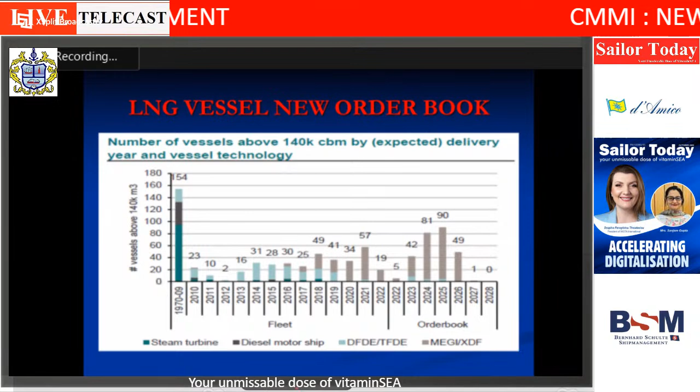And these are the containment types. If you see LNG percentage of total fleet right now, mostly membrane vessels. There are two companies which are pioneers in gas carrier construction: one is Gaztransport, and the other is Technigaz. Both are French companies, and they merged together close to 2000 to become GTT, Gaztransport & Technigaz.

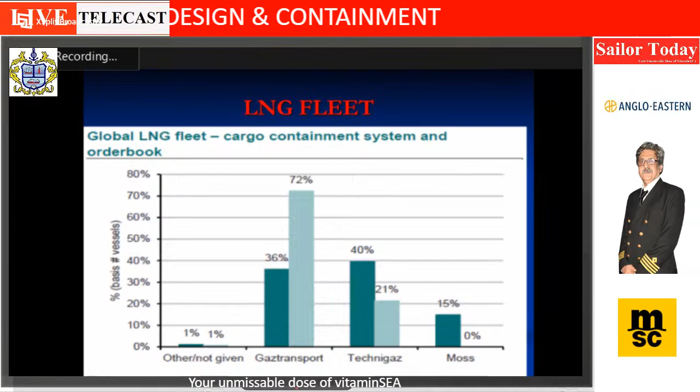If you see the percentage of total fleet right now, roughly 36% is Gaztransport and 40% Technigaz, that is Technigas Mark 3. Mostly there are Moss spherical type, what we call about 15%, but if you see the future new orders, there is nothing there. So the future is Gas Transport, which is about 72% of orders, almost double the existing number. Technigas right now is about 40%, but there are 21% new orders as you see.

This is the engine type, which MD Mr. Satya Singh will cover in more detail. But if you see, right now there are more than 150 ships, maybe next year. If you see the orders, it goes to more than 400, and he will cover more details on this.

The next one is DFDE and TFDE, dual fuel, so you have about more than 200 ships, but if you see the orders, not many. Same way, diesel motor, not many new orders. The new order maximum is 323, what you saw, mostly covering MEGI and XDF. So that's about the proportion - the future will be mostly MEGI and XDF in LNG vessels.

And these are the containment types. If you talk about what are the containment systems in new LNG vessels, self-supporting is mostly Moss type.

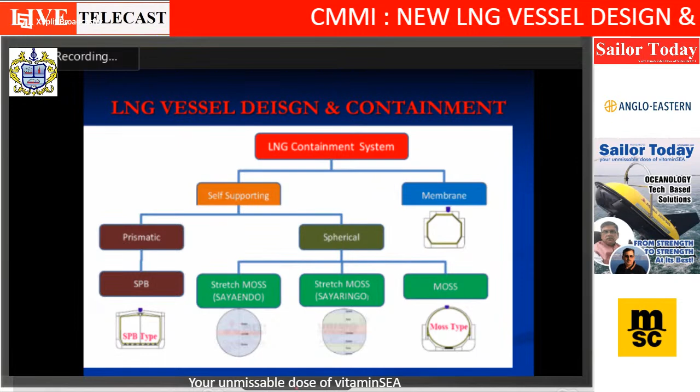But the maximum in number, if you see on the right side, which is membrane, you have NO96, Gas Transport NO96, there is a new design, and Mark 3. Also there is Mark 3 X and X Plus. And Moss, there are not many, but there are a few new designs of Stretch Moss. Standard Moss is about 140k cbm, and it is now stretched to close to 150 and gone up to 180.

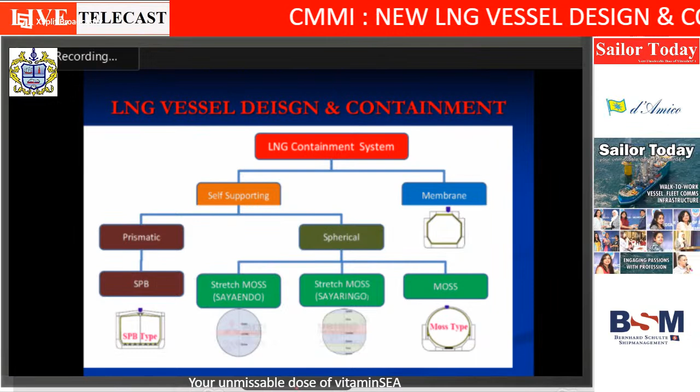So that design is Stretch Moss, but in future as you see there is hardly any. So those designs we call Sayaendo, which is Stretch Moss about 155, and the other one is 180. We just covered each one, and this is the membrane type.

Mark 3, there are a few new versions - Mark 3, the last one, Mark 3 Flex, comparatively much better, and on GTT NO96 also the new design. CS1 came way back in 2003 or 2004 but was not successful. Three ships came out but after that nothing.

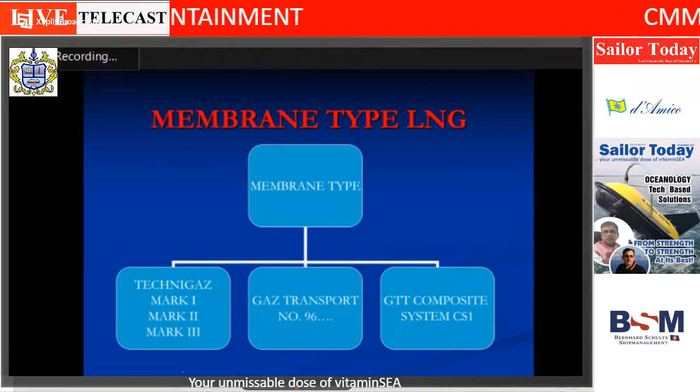So as far as the picture is concerned, it is Mark 3 and 96. Most of the yards in Korea and China use GTT, so it's either Mark 3 or 96 newer version. These are some of the numbers - if you talk about delivered and also on order combined, 96 is about 354 ships, present plus ordered, about 44% of the total. Mark 3 is about 56%.

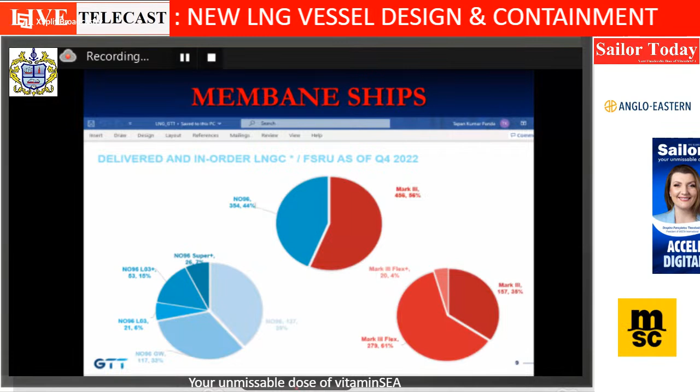And these are the breakup. If you see on the left side, breakup is about 26, 7% in NO96 Super+, LO3 15%, and glass wool, GW glass wool is about 33%, but present is about 137, which is roughly about 39% of the number. And if you talk about Mark 3 Flex, it is about 61%.

So that is covering most of it. The future is Mark 3 Flex design. I have some photographs also.

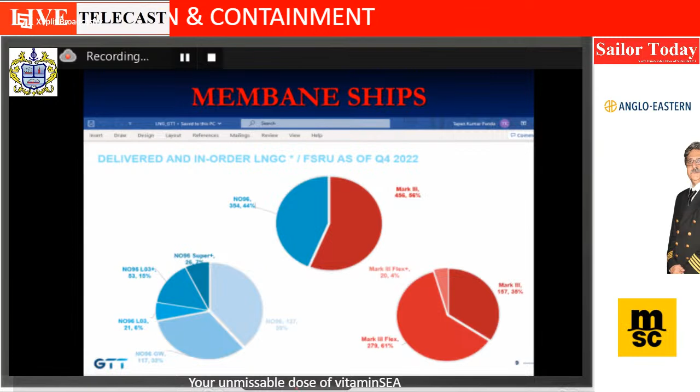So if you see the thermos flasks - the glass design in Mark 3, you have 1.2 mm stainless steel membrane. Glass coating is replaced with 1.2 mm stainless steel coating, that is your primary barrier in Mark 3 design. And NO96, it is Invar, 0.7 mm steel membrane. I have some better photographs where you will be able to see.

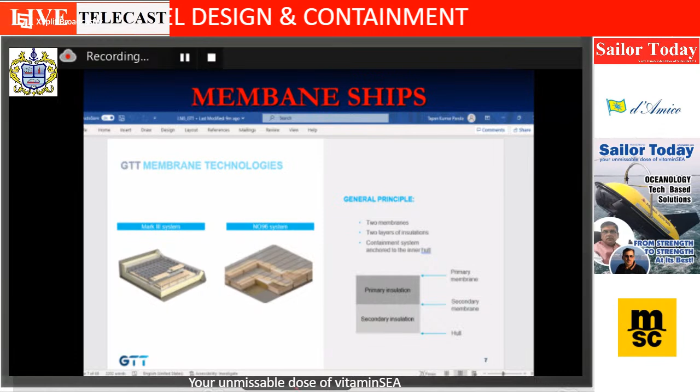So this is on the left, as you see in Mark 3, that is 1.2 mm. But NO96, it is 0.7 mm Invar. There is also a primary barrier and a secondary barrier, ensuring that the cargo is kept safely. So this is how NO96 Invar membrane looks, Invar 0.7 mm.

Now what is Invar? Invar is a stainless steel alloy with 36% nickel. Nickel is very good when you talk about low temperature cargo, that helps quite well. And what you see behind, we call it tripod mast - all your pumps and everything you will be able to attach to that. All precision instruments are attached to tripod bars. So this is how a tank looks like.

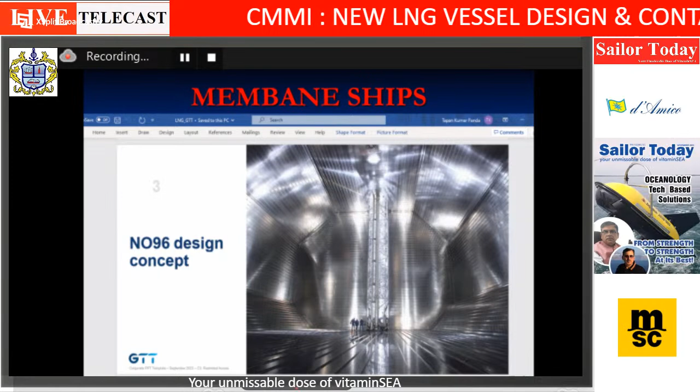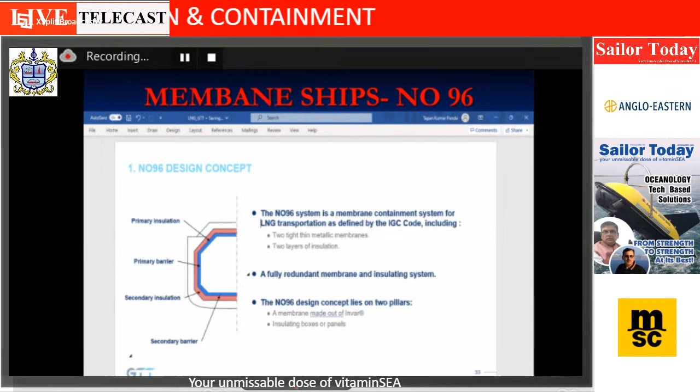There are two options, both successful for almost the last 20 years. From the 90s, these two designs have come and become successful. In the future, it will be both Mark 3 and NO96, and both are under GTT. GTT is when a ship is built, you need to ensure that the tanks are constructed with the design they are, and they ensure everything - in case any problem like a leak occurs, they also look after it.

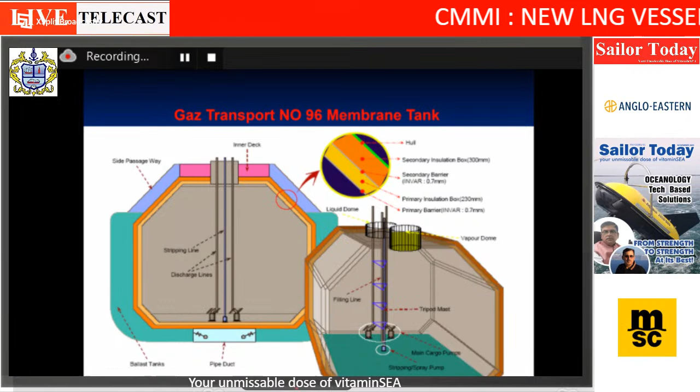And these are some photographs of primary and secondary barrier. So if you see this is the NO96, and primary barrier is Invar 0.7 mm. Primary insulation box is 230 mm. Secondary barrier again Invar - so there are two Invar membranes in NO96, 0.7 mm, very thin membrane. And secondary insulation box is 300 mm, those are plywood boxes. As you see the tripod mast behind, that is liquid dome.

So this is Invar membrane NO96 under view, and nickel is 36%. That makes it better and healthy. So this is NO96 design.

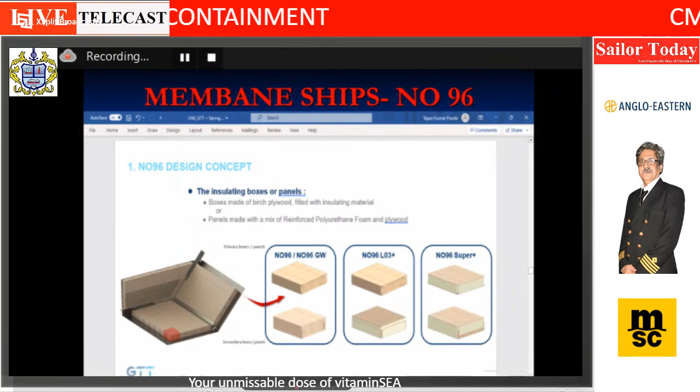So NO96 - now the latest versions are one is glass wool, other is L03, and the advantage is when you talk about boil off rate, every day how much liquid will evaporate. So with this new design, the boil off has come down from 0.15% of the whole volume to almost 0.07. So the third one, NO96 Super Plus, close to 0.07 boil off, and initially it used to be 0.15%, which was accepted at that time. Now it has come down.

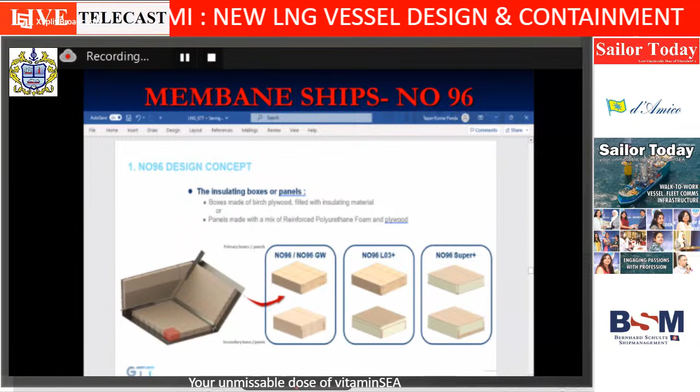So these three designs ensure boil off control is much less, and also many of the designs are now with PRS and FRS, which also helps in a way. So this is the insulation in NO96. Same way we'll see also Mark 3.

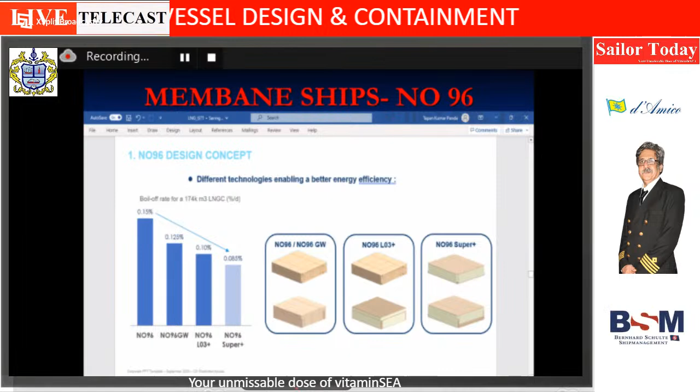And live boxes, as you see on the screen, this is how it looks like in glass wool and L03. They are always actually foam. Super Plus also with foam.

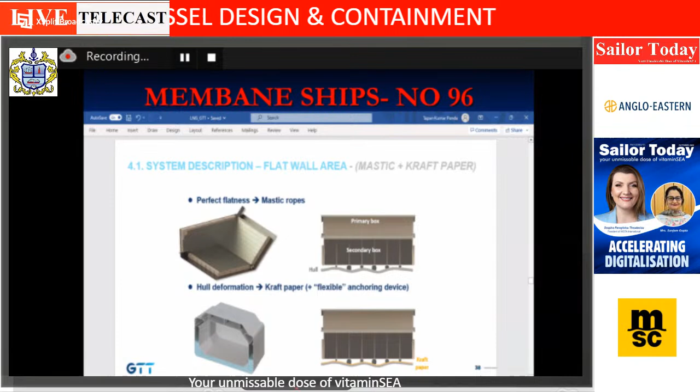This is another view of Invar membrane, 0.7 mm. This is NO96. And this is the primary box and secondary boxes in NO96, your design.

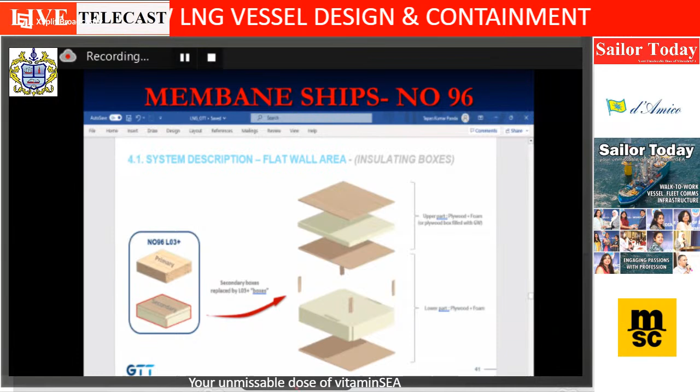This is foam. And if you try input with the new NO96 design, now we use the Mark 3, with primary boxes and second box. This is 1.2 mm stainless steel membrane, which is for Mark 3.

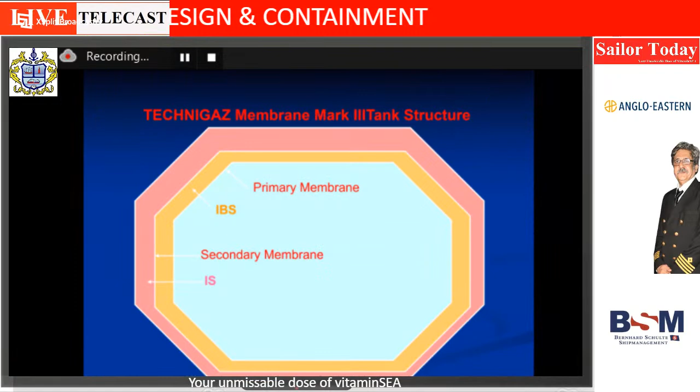So what you see is 1.2 mm stainless steel, but it will be reinforced, and there are compressions, two each, sort of corrugation. So this is the IBS. What we call the primary barrier is 1.2 mm stainless steel, secondary barrier is 0.6 mm triplex, and the yellow color is the IBS, interbarrier space, which is generally pressed with nitrogen, so you have to do a nitrogen generator.

So that takes care of it. In case there is any leak, you come to know with nitrogen pressure. There are some settings also for IBS and IS. The pink color you see is IS, insulation space, and then the cofferdam and the inner wall.

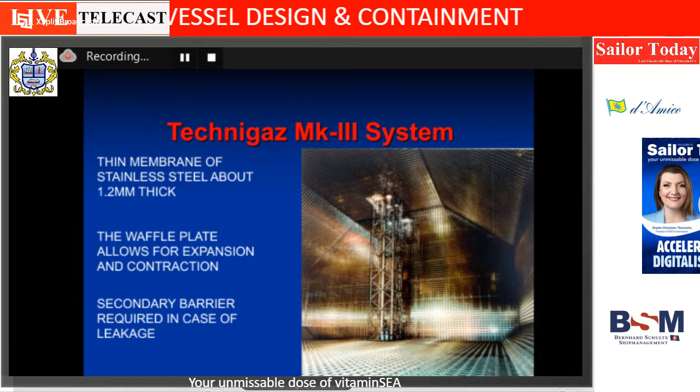This is another view of Mark 3, this 1.2 mm stainless steel plate. This arrangement we call the waffle plate arrangement, and that is good for cryogenic. So when you talk about low temperature cargo, it helps.

This is magnified, with the primary barrier being 1.2 mm stainless steel plate. Primary insulation is 100 mm, and the secondary barrier is triplex - what is triplex we will see in a later slide - and the secondary insulation is 170.

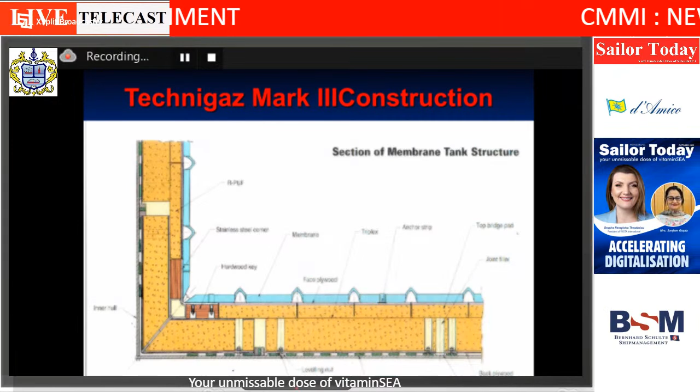This is another view. So what you see, the primary barrier is 1.2 mm, and what is protruding out is the waffle plate arrangement. That takes care of expansion and contraction better, especially when cooling or warming up, going to dry dock, and also for cooling down while going for loading, so this helps.

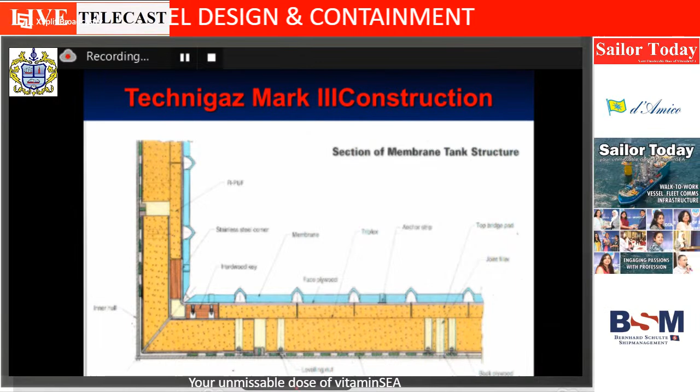The secondary barrier is triplex, and we use polyurethane foam in insulation. This is triplex, 0.6 mm, a combination of glass cloth and aluminum foil. Thickness is 0.6 mm, again very good for cryogenic, and this is used as the secondary membrane.

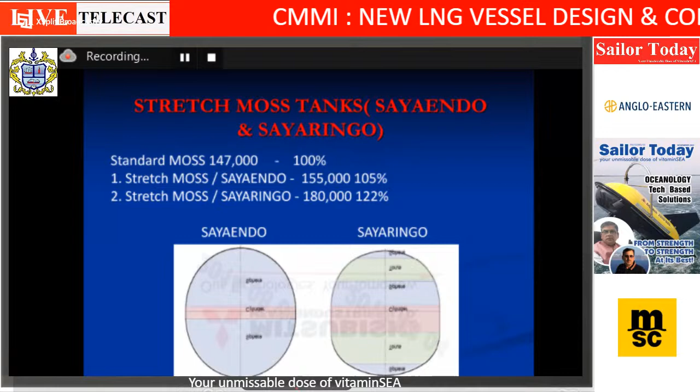The cost for Moss standard design is about 147,000. Basically where you see it protruding out on the bladder, it is increased to a size stretched to about 155,000, because the design is high and low. And another design is stretched further on the bottom as well as the top, so we can get close to 180K capacity - that is the Sayaringo design.

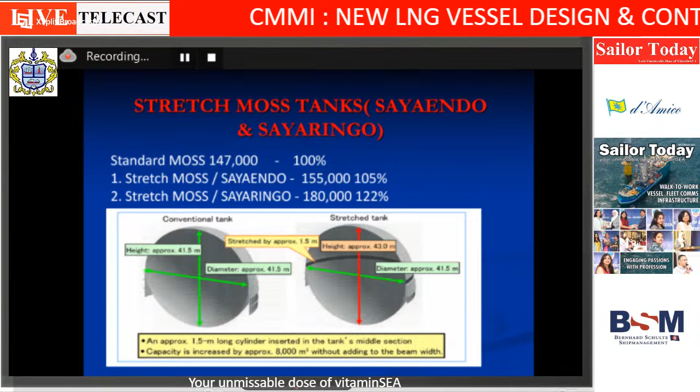If you see this, both spheres are about 41.5 meters diameter. The height is increased by about 1.5 meters, from 41.5 to 43 meters. By increasing to 43 meters, they put in one long cylinder of 1.5 meters, and increased capacity by 8,000 cubic meters - it becomes 155.

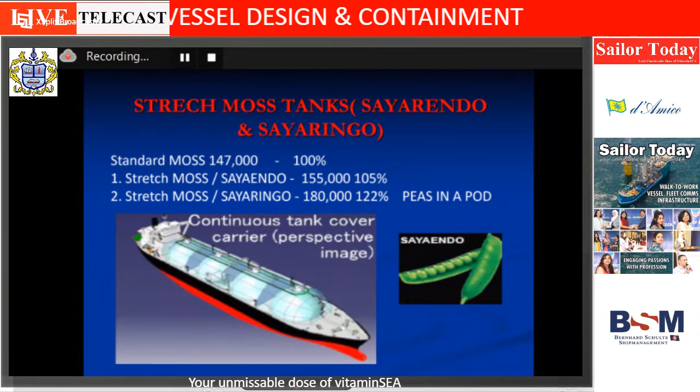With that Japanese design, which their shipyards have come out with, the same size also reaches 180K. So these are the new MOSS designs, some with continuous tank cover, where tanks number 1 and 2 are covered, and the same way 3, 4, and 5 in between. Those are the new design, called stretched MOSS - not many, but there are a few. It helps with wind resistance, fuel saving, and maintenance.

So these are with continuous tank cover. And this is the last design, which is SPB, the self-supporting prismatic type B.

It can take the weight of the cargo on its own, and so it is self supporting. And these are not many ships of this particular design, about 5 or 6 ships.

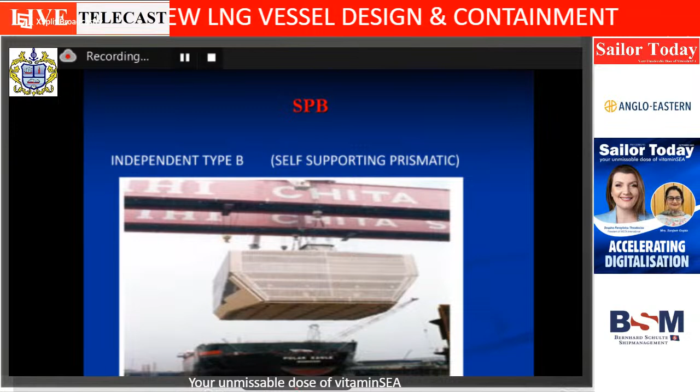They are like an LPG tank with a centerline bulkhead, so it is completely different than any other LNG design. This is not like the coastal tanker design with centerline bulkhead and swash bulkheads. This is slightly different, and there are supports. At the bottom there are supports and boards, which is mostly seen in LPG ships, E-grade LPG ships, of similar design.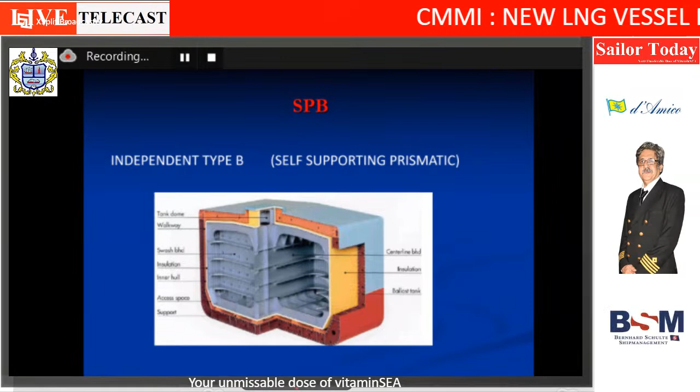Supports are there, and you find centerline bulkhead also. We call this independent type A. This is type B, and a few ships are there. In 2018, a few more ships came out, and this is void space for inspection. You go inside and inspect the tank and the boards. This is all the tank support, and sometimes you see the seaway also making the tank move. This is the tank supporting type B design.

So this is how the ship will have type B, this is SPB. Then self supporting prismatic type B is against the manifold, which is slightly different than MOSS as well as. Thank you.

Thank you, Tapan. That was an excellent, very interesting presentation.

This subject is LNG propulsion. LNG basically in the last 20 years has been the most dynamic in exploring different LNG propulsion options. No other type of vessel has ever needed to explore different propulsion options like this. They were all standard either 2-stroke or 4-stroke diesel engines. So why basically different propulsion options needed to be explored in LNG is one of the challenges.

The membrane system, which Captain Tapan Panda was mentioning - MOSS and membrane and different SPB - all these changes are happening over a period. Actually, in 1964, when LNG started, the boil-off rate used to be 0.25% per day, meaning if 100,000 cubic meters of cargo is being carried, 0.25% means 250 cubic meters of cargo will boil off due to heat ingress if your insulation is not effective enough, or whatever best we could put.

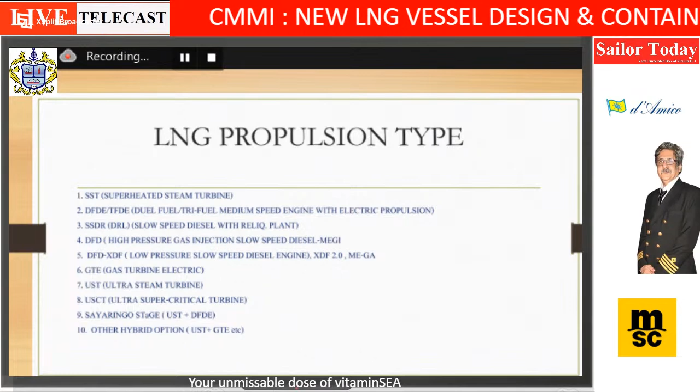Anyway, it will be boiling off. So the whole LNG industry had no better choice than to consider different propulsion options where they can utilize the LNG as fuel and better save the cost of the bunker. That is the reason we talk about LNG propulsion differently than other types of vessels.

So this industry started with the superheated steam turbine. For a long period, maybe almost 35 to 40 years, there was no competition to superheated steam turbine as a propulsion option. This was very reliable, not so efficient, but it continued because of the reliability for a long period.

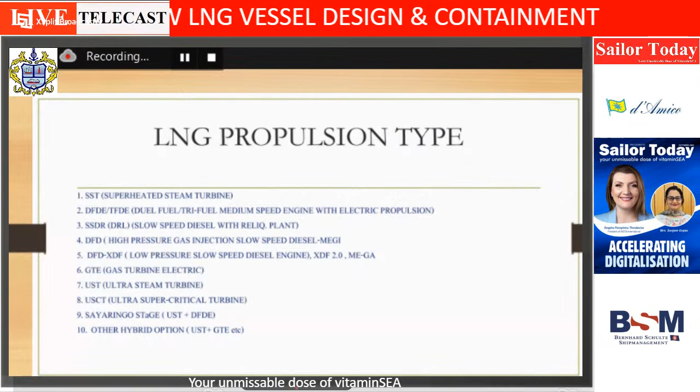Only after 2005, the diesel industry started to challenge this propulsion option. Then came different options, as you can see - DFDE, TFDE, DRL, high pressure. I will come to all of this briefly.

So broadly, if you see the volume of gas which is anyway going to be generated inside the tank when you have loaded cargo, you have to consume it somewhere. Your options are steam turbine, dual fuel engine, gas turbine, direct diesel engine, and reliquefaction plant. These are the options you will basically be using.

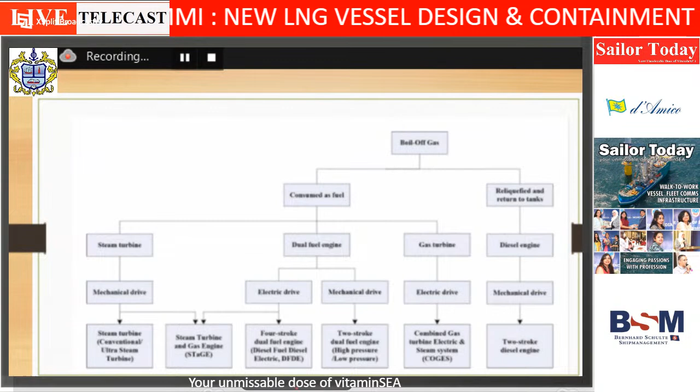If you are using a steam turbine, which was mostly being used, by 2005 maybe 99% of propulsion was only steam turbine. Only from 2006 things have started changing, and today steam propulsion is only 31% in existing vessels. So this last 18 years has been a real emergence of different propulsion options.

So this steam turbine, conventional steam turbine, there are some advanced steam turbines, which is the ultra steam turbine. Then there is the dual fuel engine, also called tri-fuel diesel electric or dual fuel diesel electric.

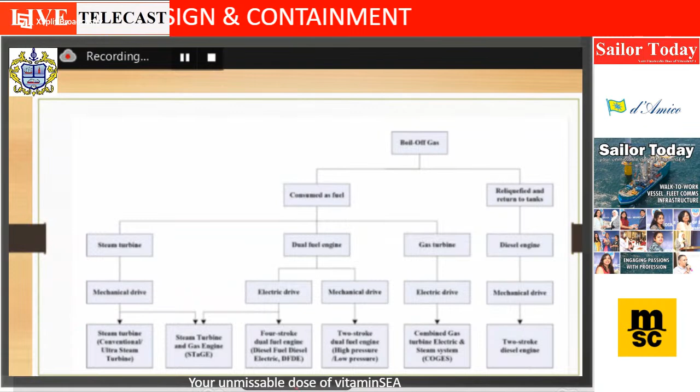Here you can basically use diesel or gas, and use the electric drive, with two big propulsion motors instead of the diesel main engine. There is no main engine, only generators creating a lot of power. So 40,000 kilowatts of power generation can be brought to the motor, and maybe 26,000 kilowatts for the propulsion motor, and you continue to drive it. So that is the dual fuel type of option.

Then you have gas turbines. Though this option is approved by classification, there are not many takers, except maybe some naval forces for small purposes.

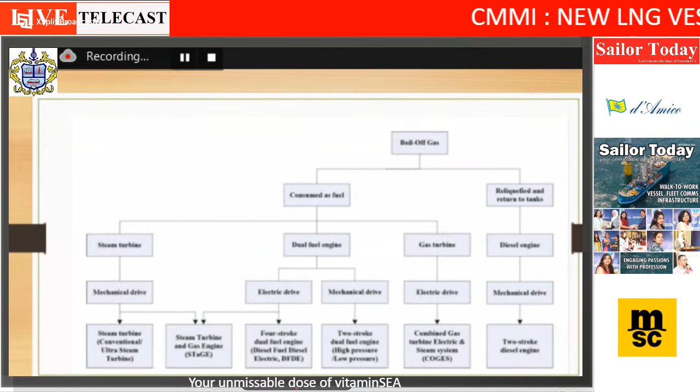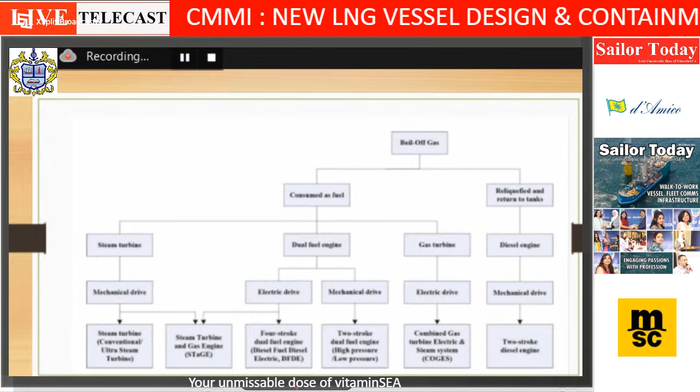Not specific to VLCC or LPG, but bulk container seagoing power itself can be 700, 800, 1000, 1200, 1500 kilowatts. But a reliquefaction plant's power-guzzling capacity can be so high, up to 5400 kilowatts, that many do not want to choose this option. That is why the reliquefaction plant option in LNG has remained not so commonly chosen.

Now, if you look at efficiency, why do we choose at the end of the day the efficiency of the propulsion?

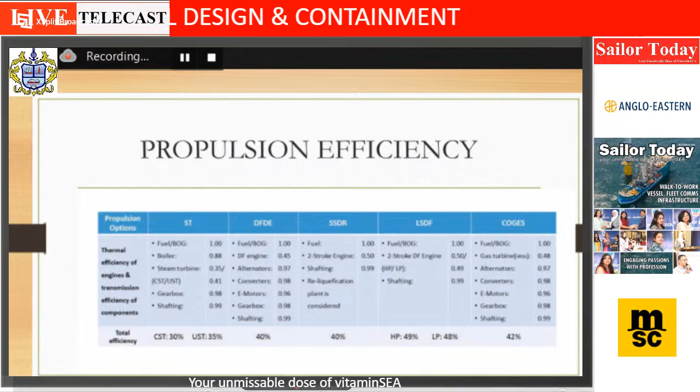So a typical steam turbine has been very, very poor in terms of efficiency, only 30% thermal efficiency. So when fuel was cheap, nobody bothered about the cost. Maybe it was going on through the 1960s, 70s and 80s, and it was reliable, so it was fine. Nobody questioned this efficiency matter, and it was the only solution.

Then, very recently, when the diesel industry started to offer many solutions, the steam industry thought, why should we remain behind? So they tried to challenge this and came up with the UST, the ultra steam turbine, with higher efficiency, newer technology steam propulsion, which is 35% efficiency.

DFDE or TFDE, this type of option is a 4-stroke engine, where you are basically burning gas or diesel, creating a lot of electrical power and running the propulsion through the propulsion motor.

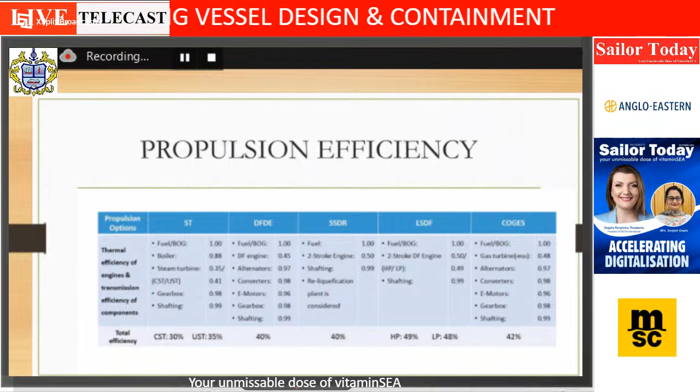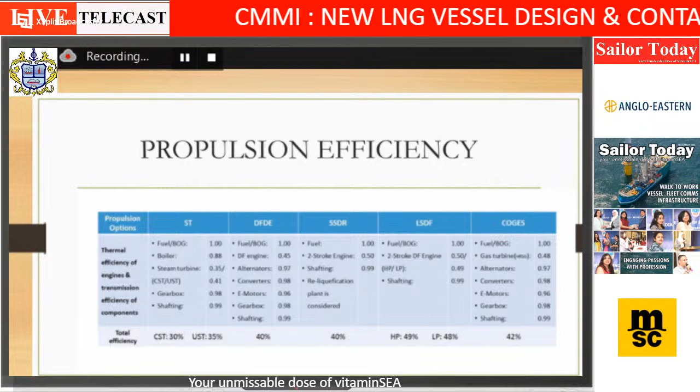Then you have low speed dual fuel engine, we will talk about that later. We also have something called the COGES system, again to do with the gas turbine option, which still doesn't have many takers, so we will not go into this. These are also not so efficient.

Nowadays we keep talking about Tier 2 or Tier 3 requirements, and this is also one of the things pushing the limits of various engines. So quickly, if you see how it fares, the steam turbine is basically meeting Tier 2 from the SOx point of view.

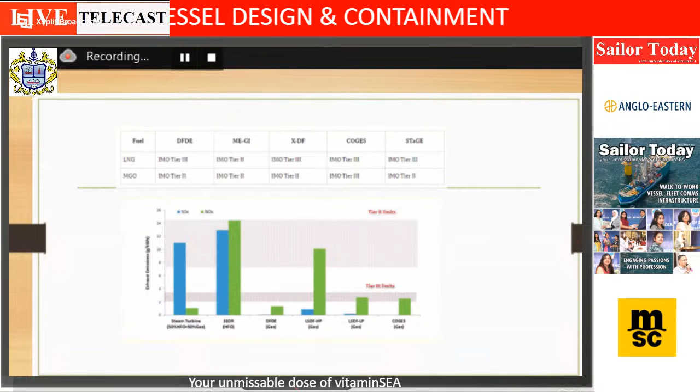From the NOx point of view, NOx is less because heat creation is basically less, but if you are using 50% HFO or 50% gas, under that condition it has been compared. If you see the slower speed diesel engine with the re-liquefaction plant, it is not meeting the Tier 2 requirement. The low speed diesel engine is not meeting the Tier 2 requirement.

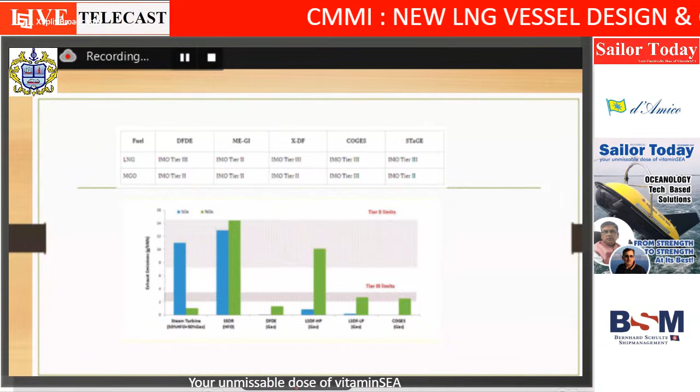Regarding this, as I go further it will become clearer. But bottom line is, if you see on top, XDF is meeting IMO Tier 3. What is Tier 3, Tier 2? If you go to an ECA area, you need to meet the Tier 3 standard for how much NOx emission is happening. Only 2.0 to 3.4 gram per kilowatt hour, depending on the speed of the engine, is the IMO Tier 3 requirement.

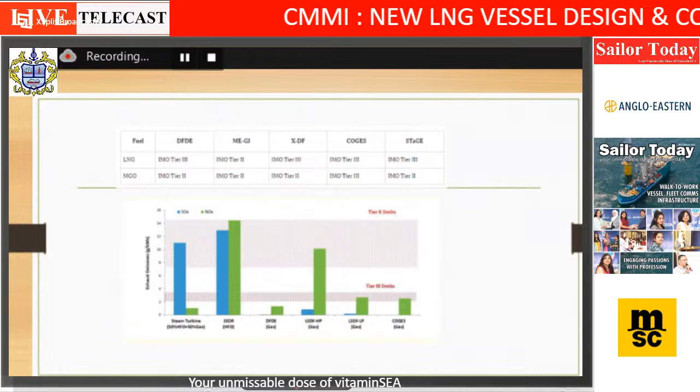This requirement is being met by XDF, but not being met by the MAN engine or MEGI engine. It is met by DFDE on gas mode, and by the gas turbine mode, that is the COGES system, or by the steam propulsion option.

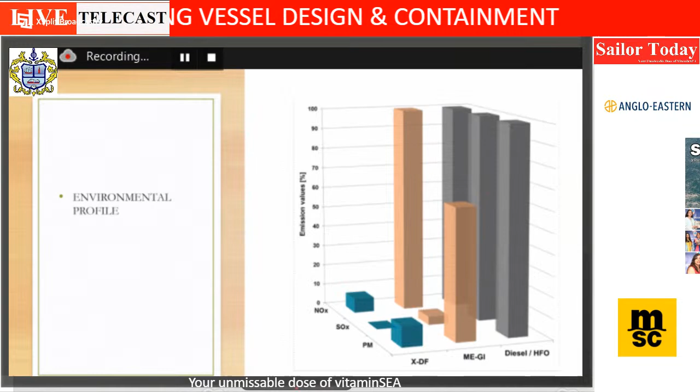If you talk about the MEGI engine, it is a 2-stroke engine where the gas is injected at 300 bar. So the difference between XDF and MEGI is that both are two-stroke engines, but XDF uses low pressure gas injection and MEGI uses high pressure gas injection.

And then there is diesel or HFO, the normal standard engine. You can see the particulate matter, SOx and NOx related general profile differences. This is the thermal efficiency, reliability, OPEX. We will not go into this in detail due to time limitations.

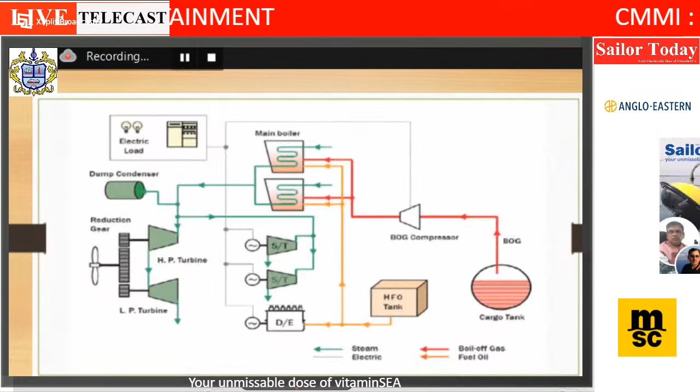To have a basic overview, here is a typical schematic diagram of a steam ship. You will see the steam ship. Simply to understand, from the cargo tank the boil-off gas is evolved and generated every day due to heat increase, since there is never perfect insulation.

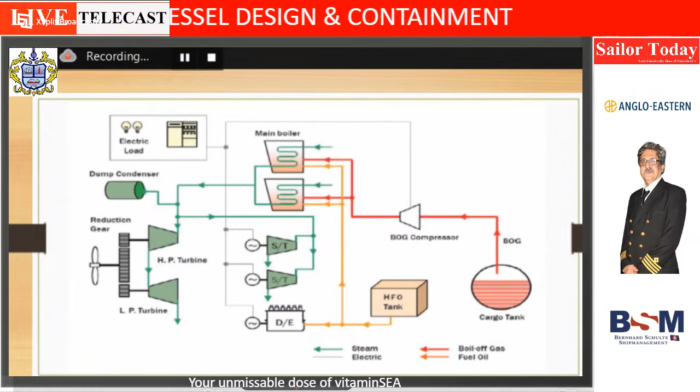That boil-off gas we take out instead of throwing it away or burning it, through a compressor, which is a centrifugal compressor, we call it a boil-off gas compressor. It is a high speed compressor which basically pushes the gas, the LNG boil-off gas, at low pressure through a heater etc. at high temperature. Finally it goes to the steam turbine vessel, to the main boiler. The main boiler is a big boiler.

Now, on a normal ship, you come across an auxiliary boiler, just for auxiliary purposes. But this is the main boiler, which gives you steam to run your main turbine and run your main propeller shaft. Using this main boiler, we create the steam, take it to the steam turbine, and finally to the stages - that is high pressure turbine and low pressure turbine. We combine the gear system and basically move the propeller shaft.

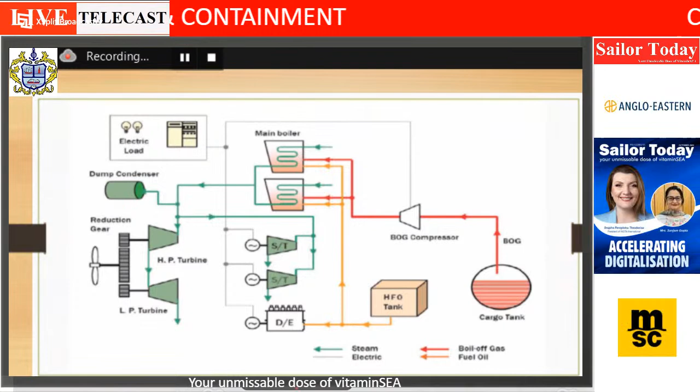Simply put, the steam propulsion option is this: we take the gas to the engine room, make it work in the boiler, burn it, create a lot of steam, run the steam turbine, let the steam turbine drive the propulsion system, and run this. So the efficiency is least because of the steam turbine design.

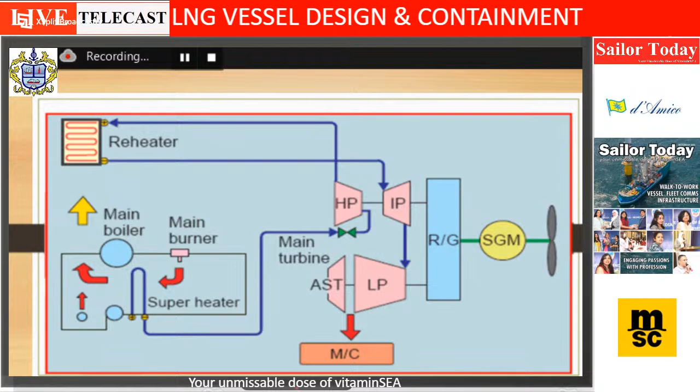Now, steam technology basically tried to push and become more advanced - instead of the 60 bar boilers on a typical steam turbine vessel, it came with 100 bar pressure, with high pressure, intermediate pressure, and low pressure. The stages of the turbine were created through a reheat cycle.

And this gave a little more edge compared to the 4-stroke engine or DFDE. It became comparable, and some vessels in the world came with this option. It is also called the ultra steam turbine - the superheated steam turbine, the standard ultra steam turbine - the efficiency basically changes as the steam pressure and steam temperature change.

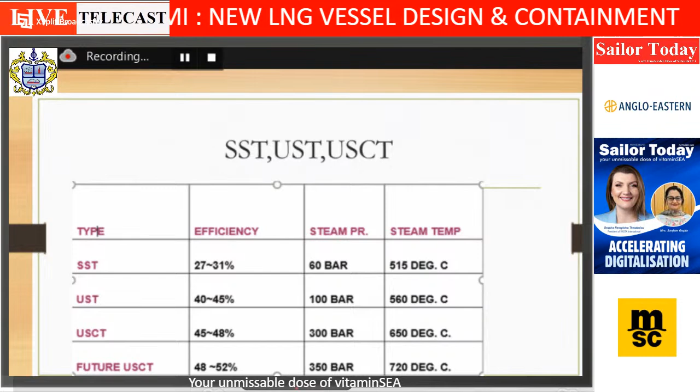And there are further ultra steam supercritical turbines, etc., which exist now. What power are you getting here? It comes through USCT, ultra supercritical turbine, where water changes to the steam or vapor phase without going through the intermediate process - it is above the critical point. So those type of boilers are different, 300 bar pressure boilers. These things are being used, and they are considering pushing this type of design to give an edge over diesel engine options.

So we just discussed regarding the steam option, which is now reducing. This is a TFDE or DFDE, two terms basically being used. DFDE has just been upgraded to the term TFDE long back, but people do use DFDE as a more common word. It has got a technical difference, but I will not go into that as of now.

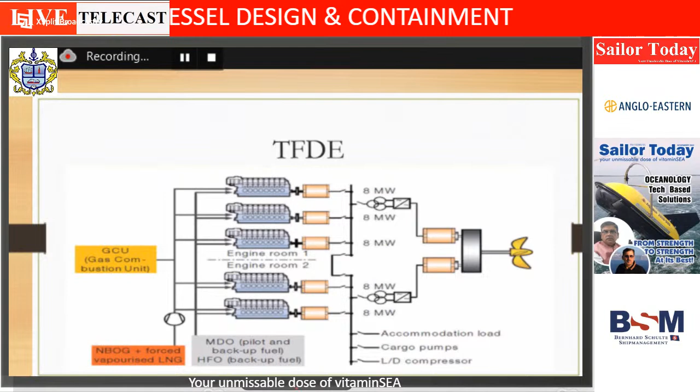Here, very simple: you have only the 4-stroke engine generator where you burn a lot of gas, LNG vapor. You can also burn diesel and create a lot of electrical power, bring it, and run two huge motors. In place of the main engine and the engine room, find two huge motors connected to the gear system which will drive your propeller. So it is an electrical propulsion - burn gas or diesel and create electrical power, bring it to the electrical propulsion motor.

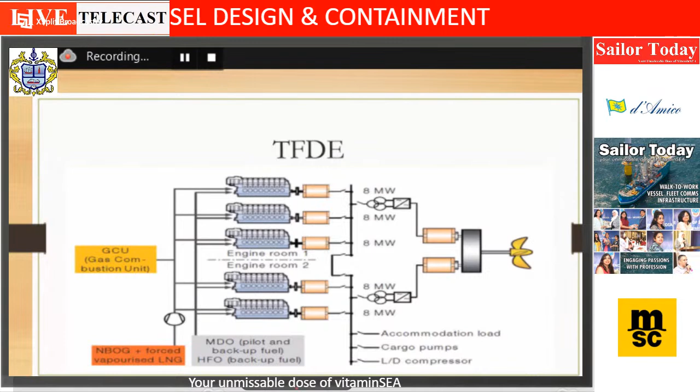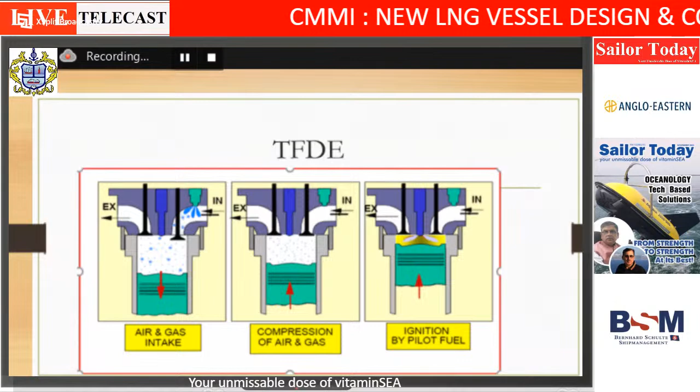And there is a pilot injection system where about 1% equivalent of pure diesel is injected. Gas is entering from the side inlet valve. This is a four-stroke engine, TFDE engine. The gas is entering, and when the piston is going down, gas and air is mixing. When it is coming up, it is trying to compress. When it is coming near the TDC, a pilot injection of diesel just injects, supports the fire, and firing takes place. The rest is done by the gas - 1% support is by the pilot injection.

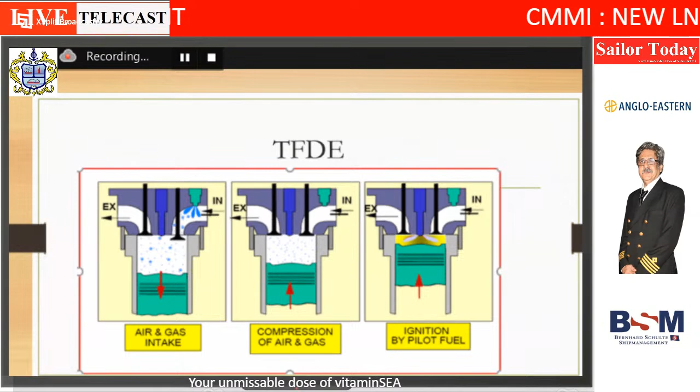So that is the basics, which is basically the lean burn principle. Here, there is something called air fuel ratio, which is adjusted to a higher side, around 2.5, instead of a typical 1.4 to 1.8 air fuel ratio. That is required because a typical engine's capacity to burn diesel or burn gas technically has a lot of issues with compression ratio, etc. So for gas burning, you have to go with the more lean burn principle, or the air fuel ratio has to be changed, otherwise the knock effect etc. will happen. So that is the TFDE related stage.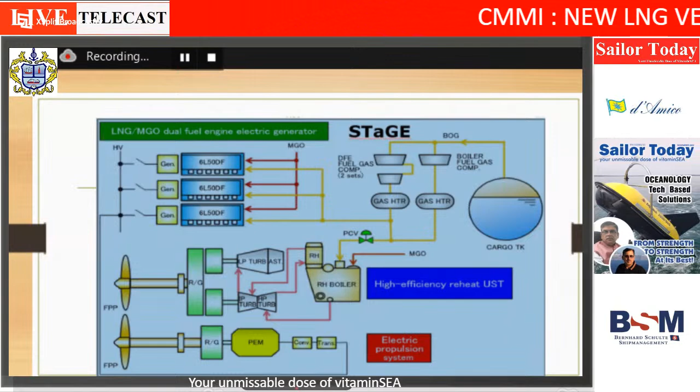This is another type of business where you will see there are two propeller shafts. One propeller shaft is run by the steam turbine, and the other is like a TFDE engine electrical propulsion action. So both are combined, A plus B. But we just took the steam - instead of steam, the steam turbine is the one part running one of the propeller shafts, and the TFDE is running the second propeller shaft, and together it is moving the LNG vessel. So this option is basically the steam and also gas, both combined with electrical propulsion combination. This is termed as a STaGE propulsion.

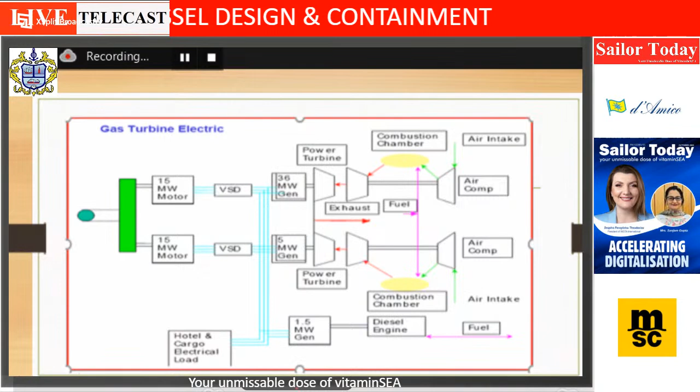Now, this is a gas turbine electric. I will not get into it because it is not getting an order book. The gas turbine is same like your aeroplane - Boeing 777 has a gas turbine. The same turbine is basically being converted here where you burn the LNG vapor, create whatever energy exhaust is created due to that. You use that to run a turbine and connect the alternator to create a lot of electrical power, and finally run your electrical propulsion. So that is the option which is a gas turbine.

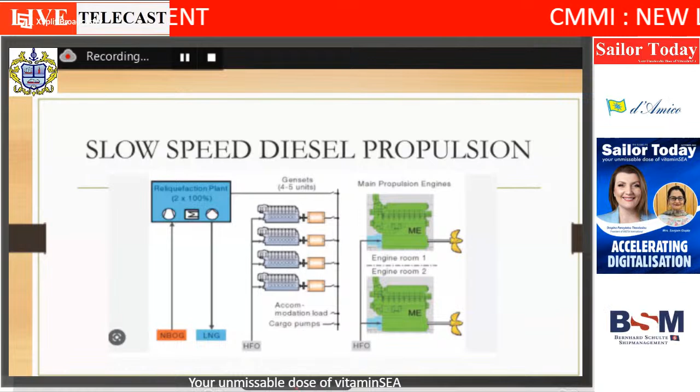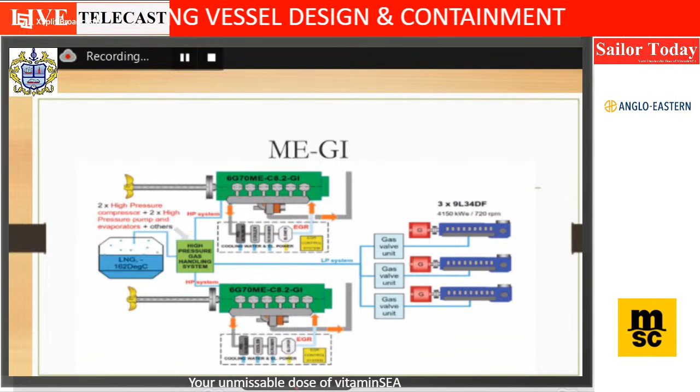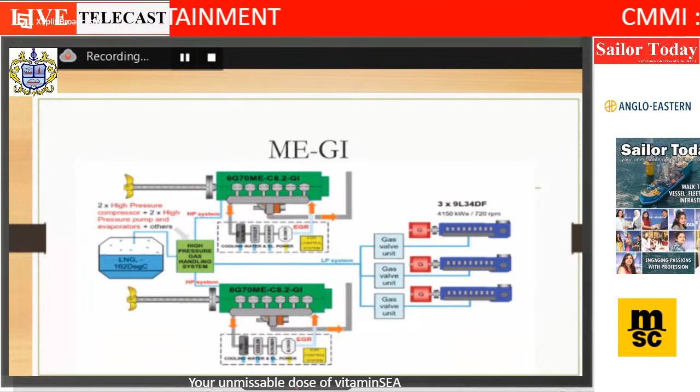Many of the IGF vessels nowadays, your containers, PCC, everywhere the LNG fuel engine is coming, one of the options used is the ME-GI engine. ME-GI is not used only on LNG carrying vessels, but also for IGF vessels where LNG is used as a fuel, whether bulk carrier, container, PCC, wherever. There is of course an LNG tank for bunkering that you have to keep, and from there the LNG can be taken into a similar engine with certain parts, just a small modification. That is basically what is used, and this will become the future. Many companies have adapted for future IGF vessels with the ME-GI option.

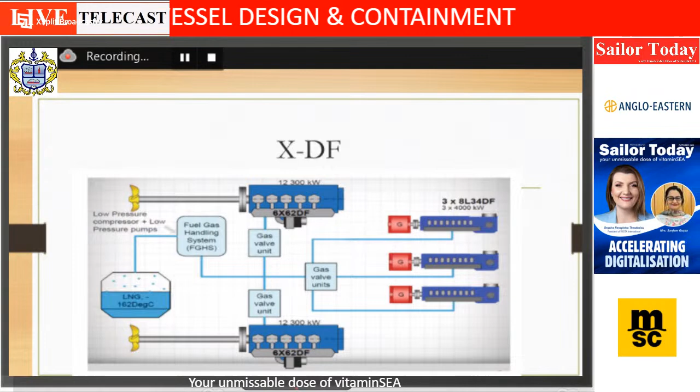This is another option which is the most latest and getting very popular. It is a 2-stroke engine, but not at 300 bar pressure gas injection, which becomes technically complicated and very costly, increasing capex. To reduce the capex and cost, the gas is injected at only 8 bar pressure instead of 300 bar pressure. This is also one type of IGF vessel getting installed.

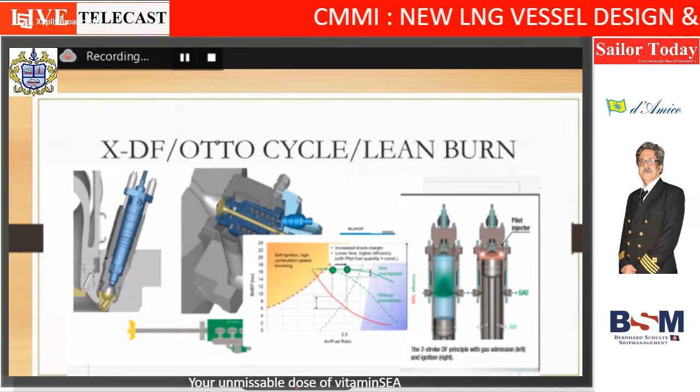So X-DF is the latest from WinGD or Wärtsilä front. Instead of RT Flex, the bigger or newer brother of that is the X-DF, with gas injection at low pressure. There is a pilot injector with a pre-combustion chamber. We have gas admission, and the gas is admitted in the middle of the liner at 8 bar pressure. It is based on Otto combustion or the lean burn principle. This is the most in traction now.

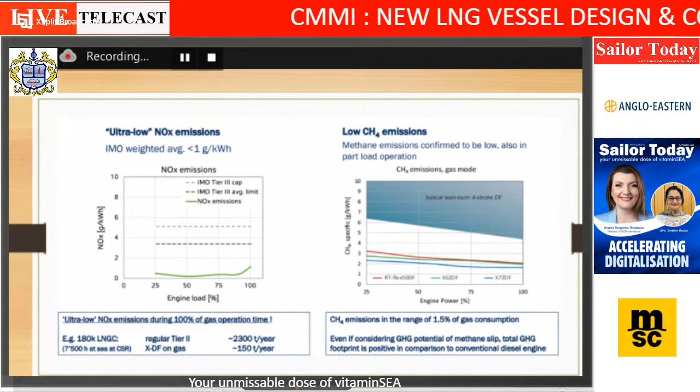The XDF vessel has ultra low NOx emission, meeting Tier 3 requirements. But it has got one challenge, called methane slip. When the low pressure gas injection happens, some of the gas leaks out through the exhaust without getting burned, and that increases the global warming potential. So there is another challenge to that, another method to address it. There has been further evolvement of the XDF second version.

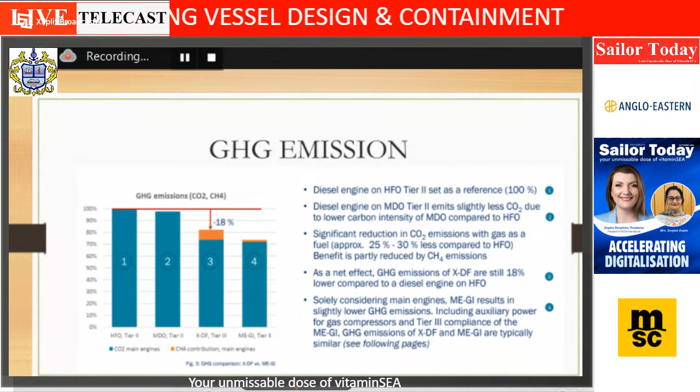Regarding GHG emissions, the MEGI engine, which is high pressure gas injection, is more effective than the XDF. But XDF is superior in total capex, opex, all these fronts. MEGI only meets Tier 2 standard, not Tier 3. So there is a conflict of whether MEGI is better or XDF is better due to Tier 3 and Tier 2 requirements. Still, the XDF is getting the frontal traction.

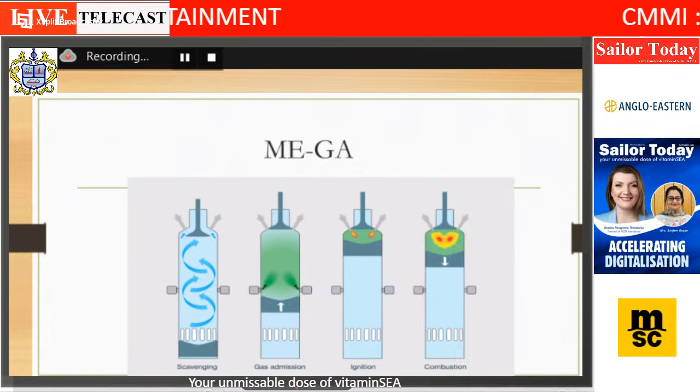Now, to give a fight to Wärtsilä, MAN B&W, which was not getting big traction, came with the challenge of the ME-GA engine. This is also low pressure gas injection, something like an XDF contemporary, and it is a new engine, going to be delivered next month for the first engine. But in the order book, 130 vessels with the MEGA engine have been ordered, and about 130 with the XDF engine have been ordered. So both are competitors now.

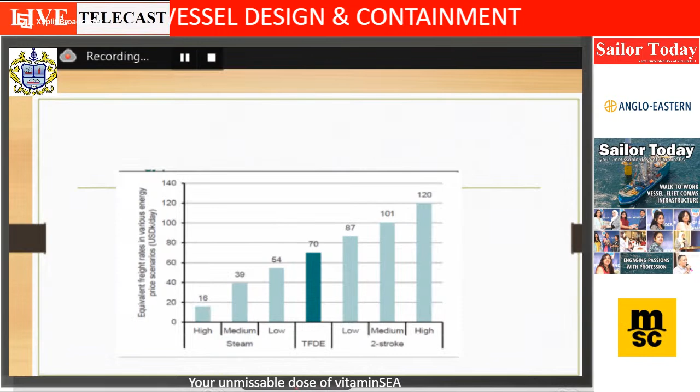If you look at the price, the freight rate, etc., a typical comparison shows 16,000 to 39,000 to 54,000. These are the charter rates, depending on the type of propulsion - this is the steam type of vessel propulsion option for pricing. There are high, medium, low different options, and it depends on the ongoing gas rate. Based on that, the charter rate has been fixed.

But you can get an idea that a 2-stroke engine is getting more and more traction and higher market demand compared to TFDE, which is a 4-stroke, or ST. So TFDE is better than ST in general from a charter rate point of view, and 2-stroke is being preferred. After 2-stroke, there is high pressure and low pressure options basically.

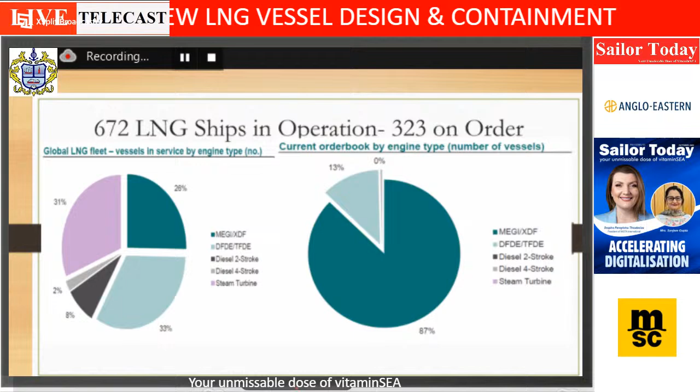So you can see here on the left side, 31% of the global fleet is steam turbine, 26% is MEGI or XDF, and DFDE is 33%. But what is the order book? 87% is MEGI, XDF, MEGA, etc., and 13% is DFDE, with steam turbine having nothing on order.

What is trending now is WinGD XDF, which is a two-stroke engine at low pressure, and MAN B&W MEGA, which is also a two-stroke engine with low pressure. This is the engine or propulsion option with the maximum on order as of today. So that's 87% - if you split this, almost all of it is XDF and MEGA.

So this is in a nutshell what we discussed - I've taken already 7 minutes more time, sorry. In a nutshell, this is the different propulsion options available in the LNG market. We have no time to get into further detailing. In case you have any questions, I will be happy to answer. Thank you.